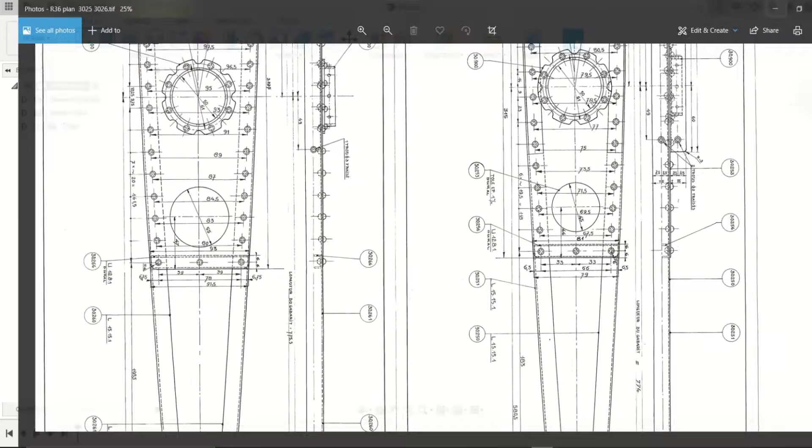Before we get started, the part that we will be creating today is a flange from the Renard R37, 38 and 40 series. So let's show the part that we will create. As you can see, this is a copy of the original design plans provided by Renard. The part number that we will design in this video is 30.900. This is the flange that we will be designing today.

Okay, so let's open the sketch panel in our Fusion 360. Either click Create Sketch or simply press L. In this case, let's select the X and Y plane.

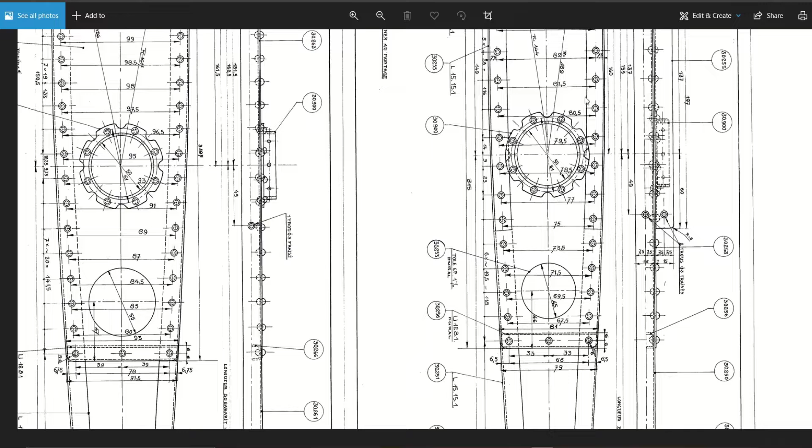Next, just sketch a rough shape that resembles half of the cross-section of the flange. So let's show the flange again - this is the flange and we will be creating a cross-section of this. So let's see if I can draw on this. So what we will be creating, if we have a flange, is this part for the revolve function.

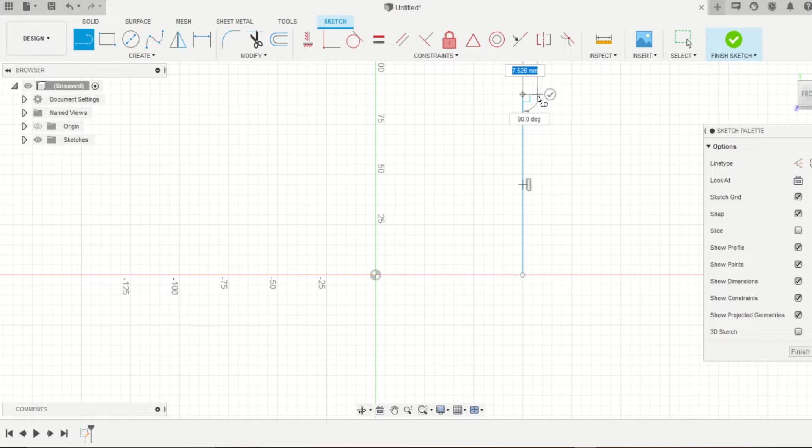Okay, so let's just create a rough sketch of it, just like this. And yeah, if done correctly, you should have this kind of L shape. But as you can see, it's still all in blue, so what we want to do is constrain the model first. In order to constrain it, let's make sure that the bottom side of the flange is aligned with the x-axis.

Let's toggle on our origin. You can just press I, and that will make your origin visible. And let's now make sure to align it - let's align this with the x-axis. As you can see now, the bottom of our flange is constrained.

Now that we've done that, let's add the dimensions. Note that because we want to use parameters, we'll first define a letter and then assign a numeric value to this letter, also better known as a parameter. For the inner and outer diameter - this being the inner diameter, this being the outer diameter - and we will define this as the thickness. For these, we will define a parameter beforehand, as they will be used to calculate the radius.

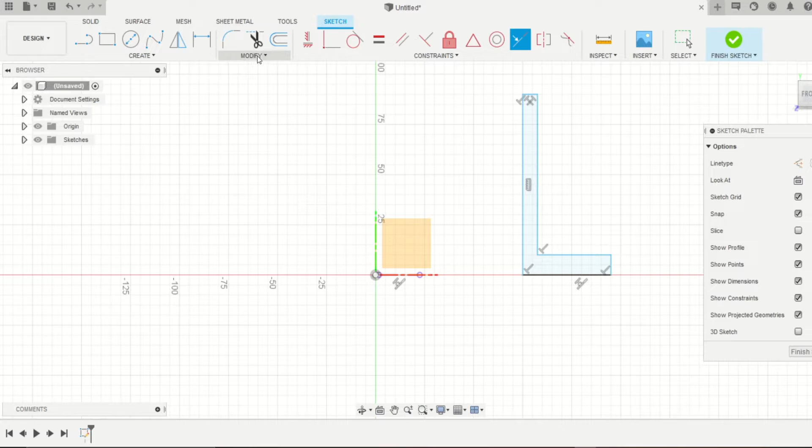So let's go to the Modify tab, change parameters, and now let's add a new user parameter. Let's enter a name - let's just choose DO, and let's say the outer diameter is 72 millimeters. Okay, next let's add another one with the inner diameter.

The inner diameter has a dimension of 50 millimeters. Next to that, let's add the thickness of the wall for the flange. So let's just give it the name T, and this has a thickness of 3 millimeters.

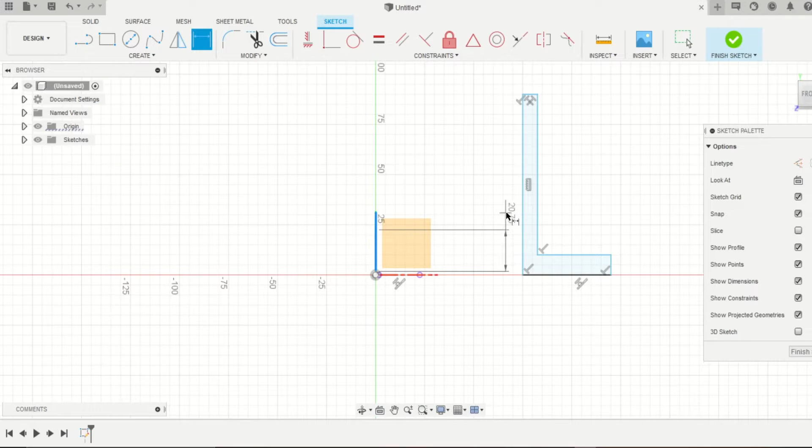So now select the sketch dimension and place your dimensions. In this case, we will say that it is equal to DI divided by 2. Let's call it RI. Okay, now we have the inner radius.

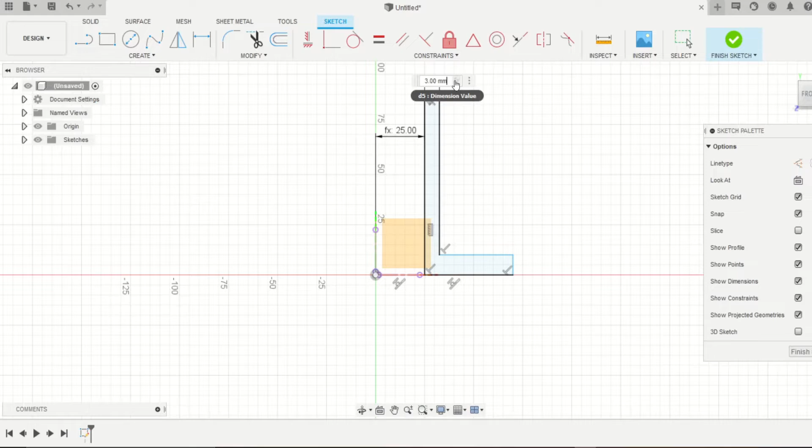And for this we will just type T, as this is the parameter that we'll be using. Then for the outer diameter we'll do the same - we'll be using a radius, so the outer radius equals the outer diameter divided by 2.

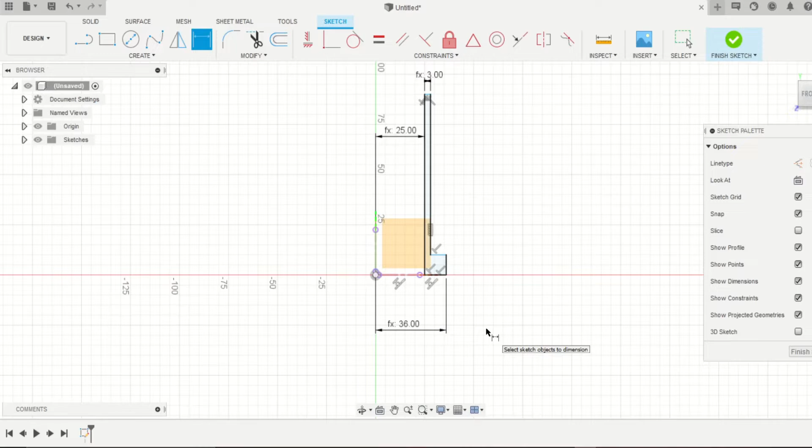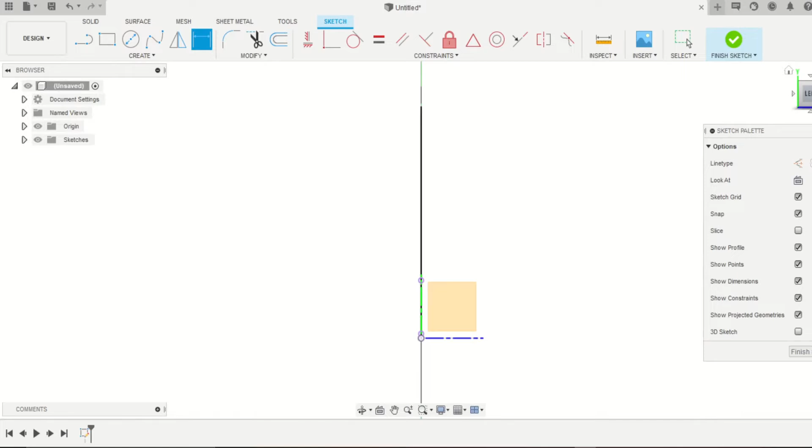Just like that. And as for the height, let's use two heights. Oh yeah, in case you accidentally change your view, you can just use your viewing cube to fix it again. Okay, so now we've got our view back.

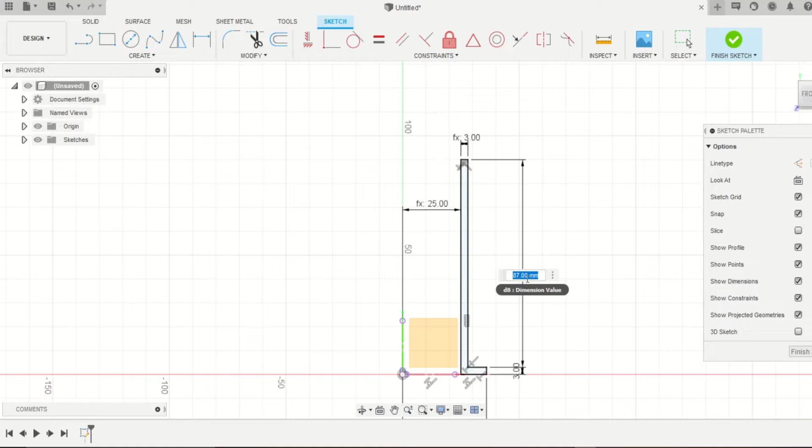So let's define our first height, h1 equals 3 millimeters. And our second height is 12 millimeters, h2 equals 12. Okay, so now we've got the basic cross-section of our flange.

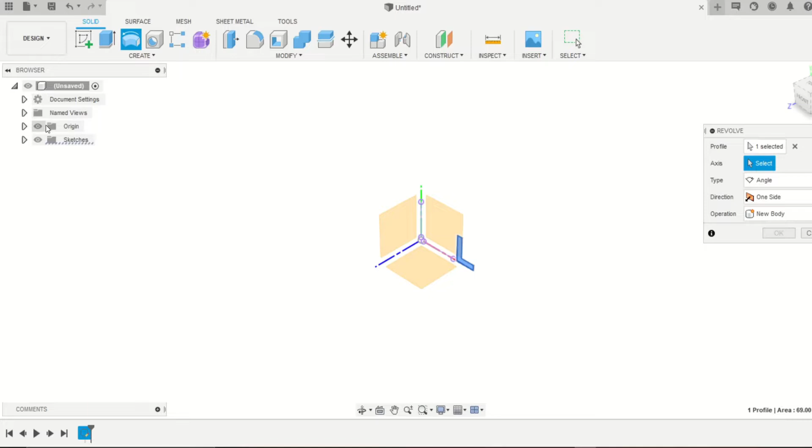What we can do now is just click the Finish Sketch button, then go to the Revolve function, select the area - in this case it automatically selects the area that we want to use for the revolution function. And now just select your axis. In most cases you can just select the y-axis, but make sure that your origin is visible. So let's select this, and now it will create a full 360-degree round revolution. And press OK.

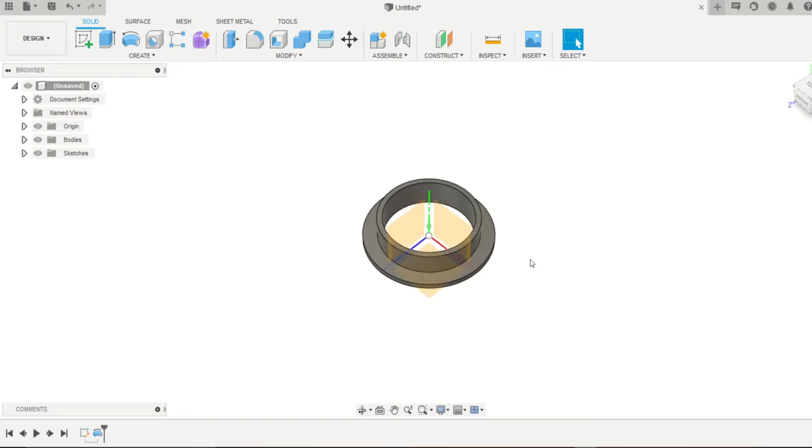Now that we have created the revolve, let's select the bottom part of the flange and start creating. So let's just quit this. Yes, so what we will do now is create the holes and these radiuses. So this is the next thing that we will create. Okay, so let's select the bottom part of the flange and create a new sketch, just like that.

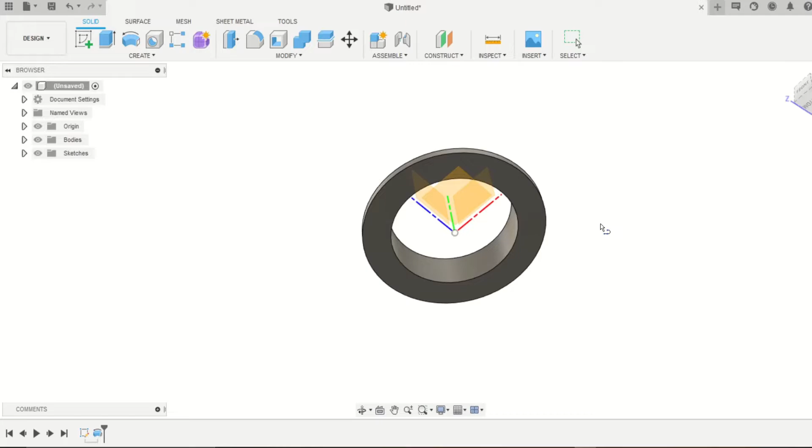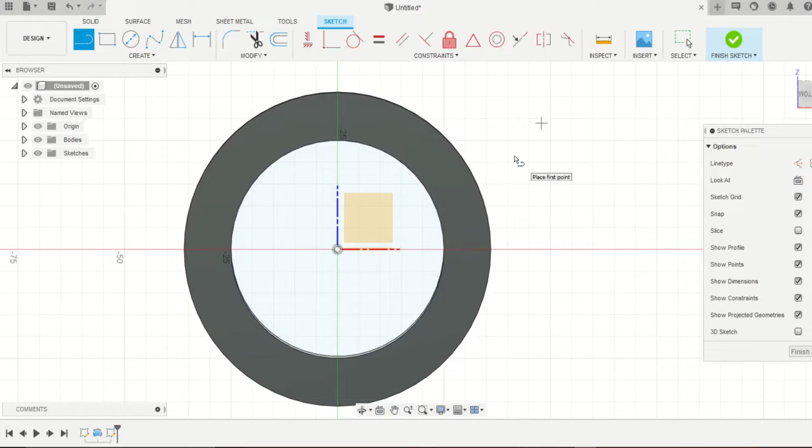Then go to project or include. Just click the project button and choose this side. This way we can visualize the perimeter of the thickness of the flange, just like that.

Okay, let's go back to the bottom view. Let's lock our view so that we can go in 3D mode again. Okay, and now let's add the holes. So in total there are 8 holes with a diameter of 4.5 millimeters.

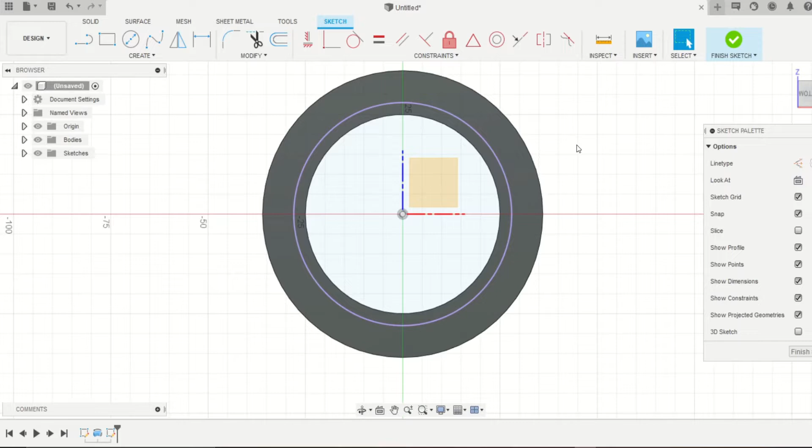So how we will do it, we can just create one hole. In this case, let's just like that. Unconstrained, let's add a parameter like dh from diameter of the hole equals 4.5 millimeters.

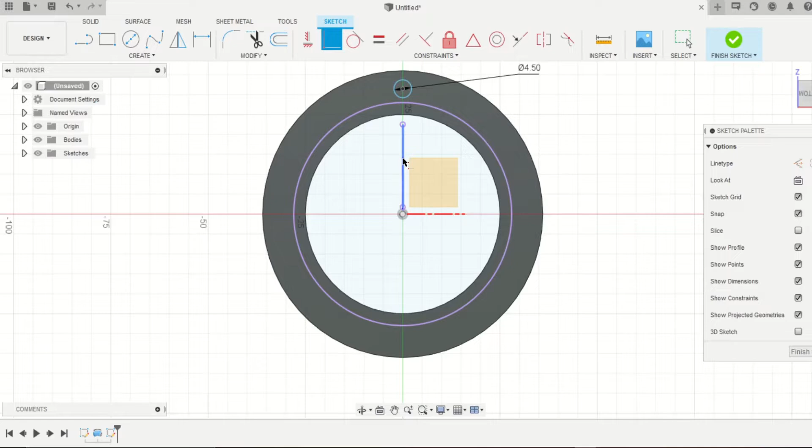Next thing that we will do is make sure that it coincides with the z-axis, just like this. And now we'll define the distance from the center. So let's say we always want it to be in the middle of the outer diameter and the defined thickness of the wall. So if we have a thickness of 4, it will automatically correct the hole so that it's always in the middle of the actual flange that we have. So if you would look at the part upside down, like the overhang that you have, you always want the hole to be in the middle of that.

Okay, so in order to do that, let's just take the outer diameter, namely 72 divided by 2, so 36 millimeters, minus our inner diameter divided by 2, or our inner radius, and this minus 3. Or to put it, just put it otherwise.

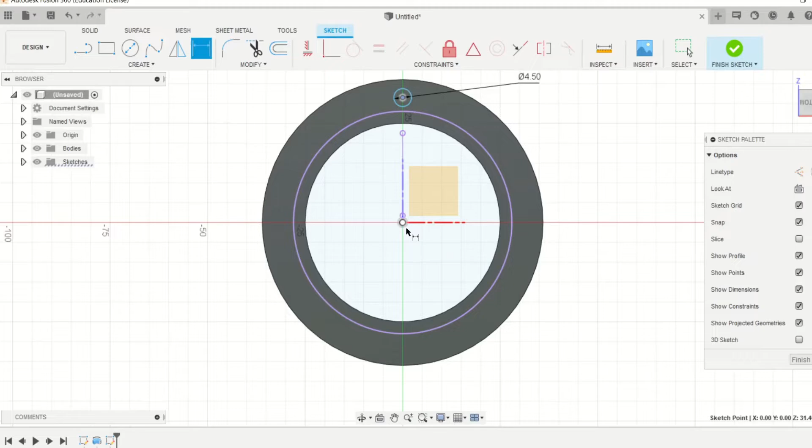Okay, so now we can define the distance from the center. So we can just simply define that by, so let's select it. Let's call this one A. A equals, let's use brackets, our outer radius minus our inner radius minus our thickness, and this divided by 2.

Let's see. There seems to be an error. I'm not sure what it is. Maybe it's just a small thing.

Okay, so in some cases, like some letters you cannot use. Yeah, it could be related to like area or surface area. So in most cases, make sure that you, if you have a red formula, check if the letter you're using isn't already used for Autodesk Fusion 360 itself. Such as, just to give a simple example, if you will use the big letter T, it will not use it because it is used for temperature calculations when you do simulations.

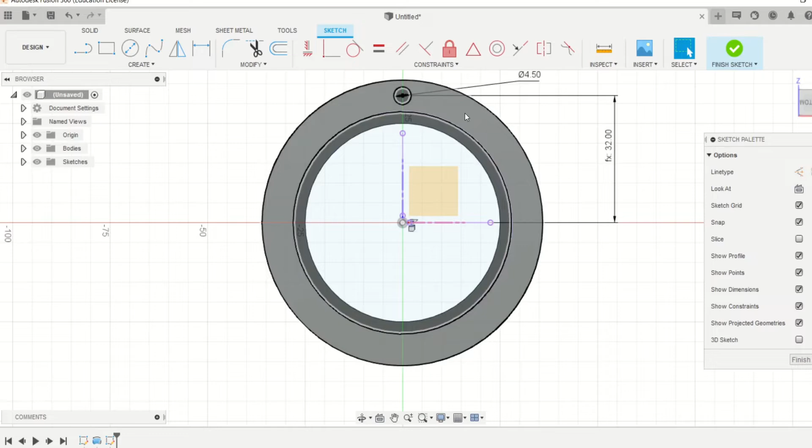So the next thing that we will create is the other holes that we have, these radiuses, and these have a radius of 5.5 millimeters if I'm correct. Yeah, 5.5 millimeters. So in order to do that, let's first give them the correct angle. They have an angle of 45 degrees.

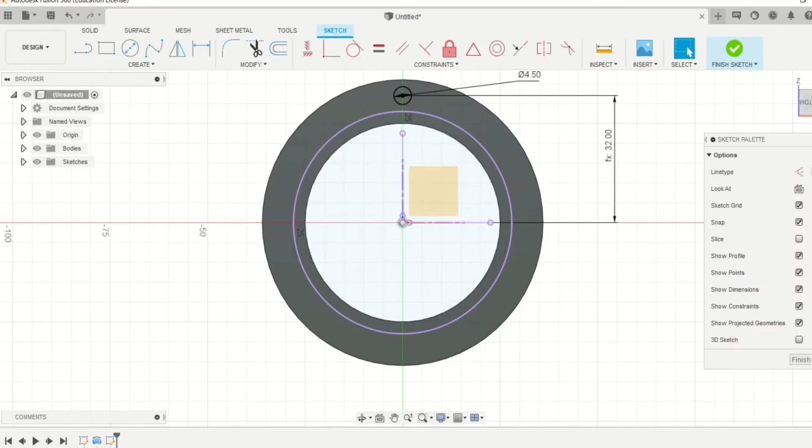So for that, let's create a line. Let's give it the same distance. So let's create a line just like this. And make sure that it goes all the way to the perimeter of our outer diameter. And let's give it an angle of 45 degrees.

So let's say alpha equals 45. Oh, my bad, 45 divided by 2. Alpha equals 45 divided by 2. Okay, just like that.

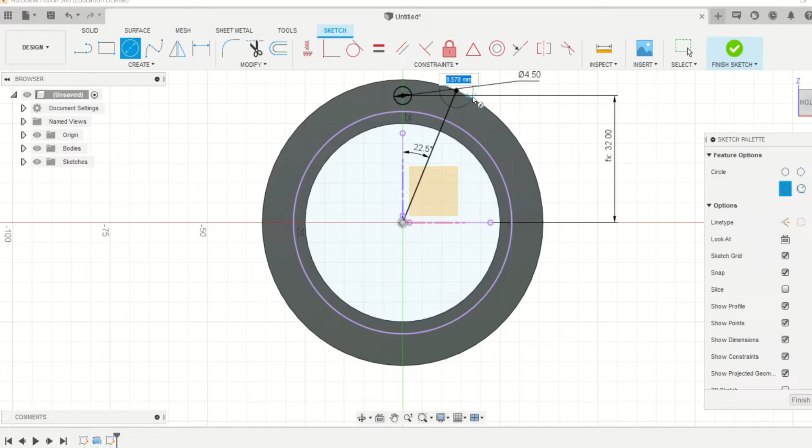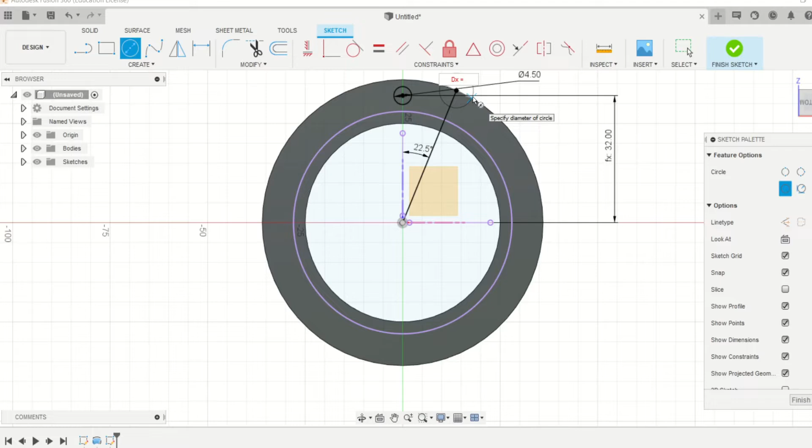Let's now create this section. And it has a diameter of, let's say, D. Let's call it dx in this case, equals 11. Just like that. Okay, now we've done that, we can just finish the sketch. Press extrude.

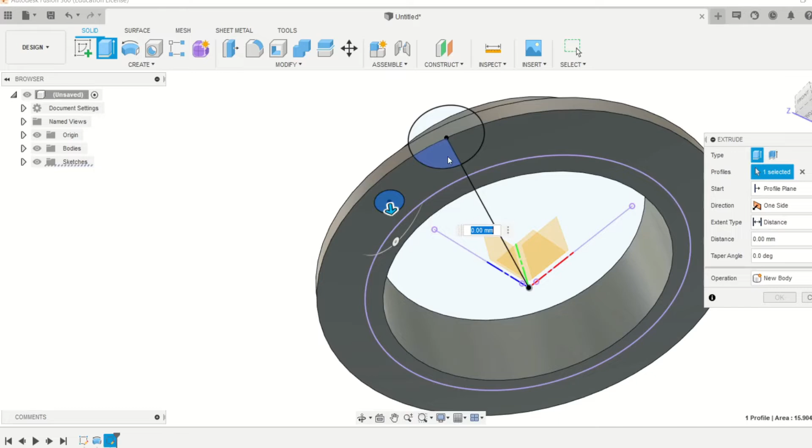So let's go to the extrusion. Select the profiles that we want to extrude. And we can just cut it all the way through, just like that. Okay, press OK.

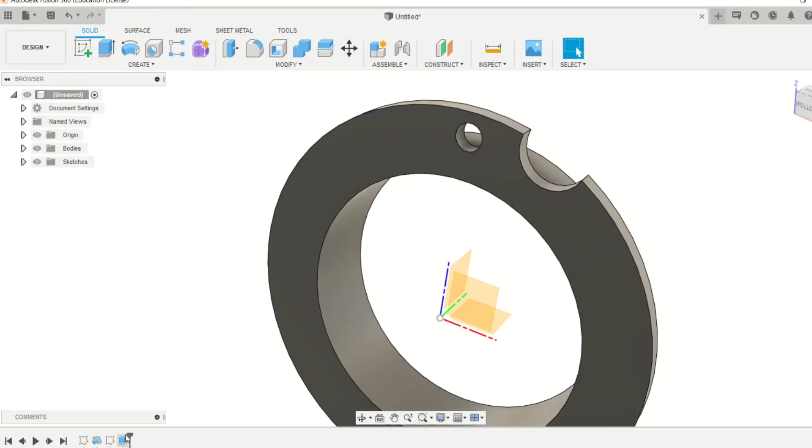Now that we have that, we can select them using the Control key, or just selecting our extrusion in our timeline. So let's select the extrusion, create, go to pattern, circular pattern. So yes, there are objects and features that we want to select. You could also do it for bodies, but in this case we're talking about a feature, such as an extrusion. Next, let's select the axis around which we want the pattern to be fulfilled.

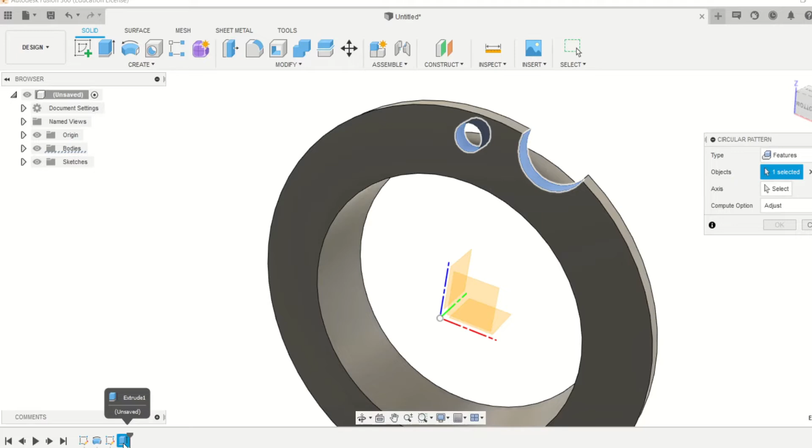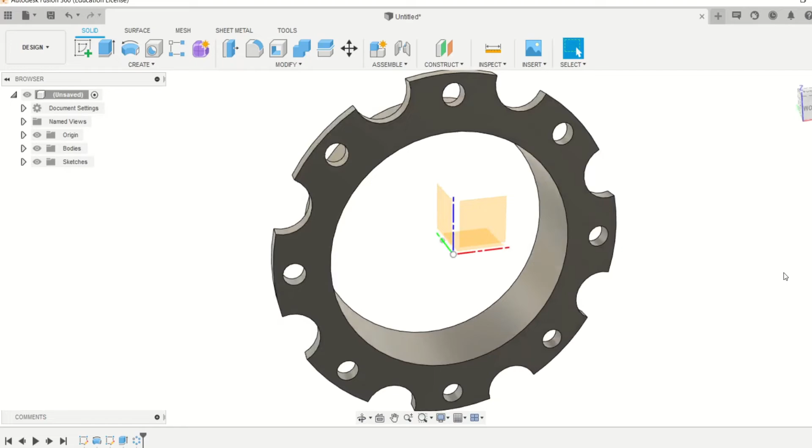Okay, so we've chosen the center axis, and now 8. And if we now press enter, we have the basic shape of the flange. Of course, we still need a radius of 3. In order to do that, let's go to the fillet and select all these edges.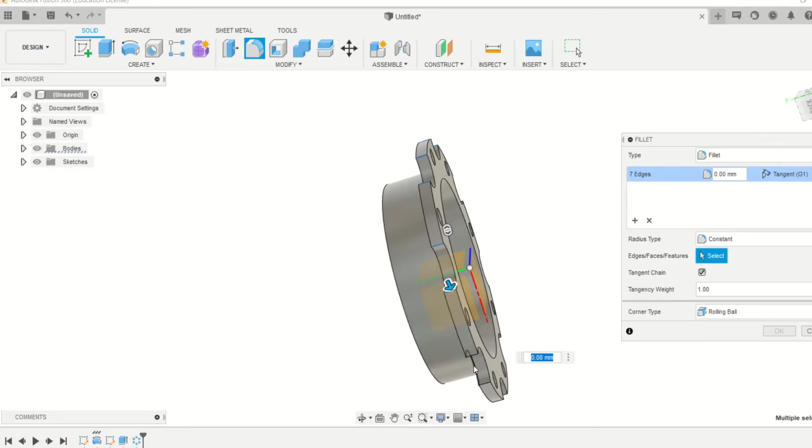Okay, and once we've selected all the edges, we can fill in the value. In this case, 3 millimeters. Hit OK, and here we have it.

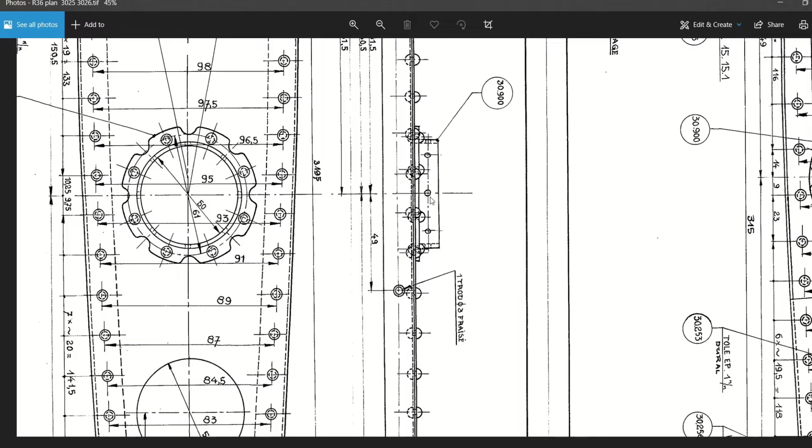Now, as you can see, we still need to add these holes. These holes have a diameter of 3 millimeters, if I'm correct. So for that, let's just choose a plane, just like that, create our circle, and say dy in this case equals 3 millimeters. Okay, here we go.

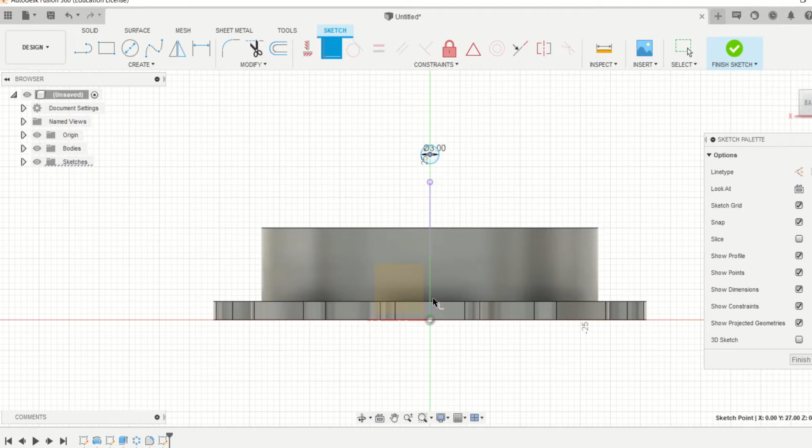Now let's make sure that it's aligned with the center axis, and the total height of this should be h2 divided by 2. So let's select this as our reference point. No, chosen the wrong thing. Dimension, just like that. Let's take h4 equals h2 divided by 2. Just like that. Finish sketch. Extrude it.

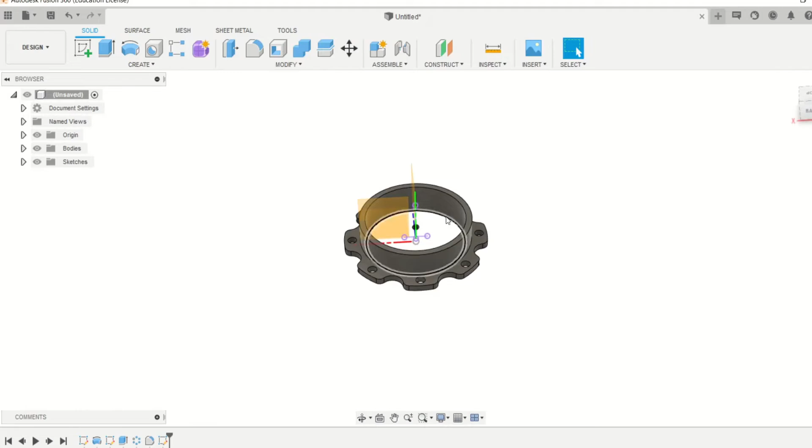And now again create circular pattern. In this case we won't choose faces, but again we will choose the features. Select the last feature that we've used, namely the extrusion or the cut that we made. Select the axis, and again 8 holes.

Yeah, I've just realized we've made a small mistake, or I've made a small mistake. This has to be inclined under a certain angle, so the hole has to be between the main holes for mounting the flange, which actually isn't such a bad thing, because now I can show you something else, namely how to create a custom plane at an angle.

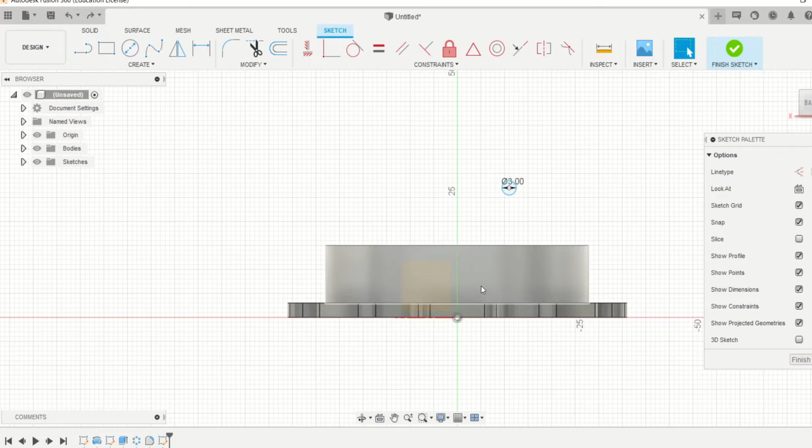Okay, so let's return. Let's create a plane at an angle. Select this axis and 45 degrees divided by 2, just like that. Okay.

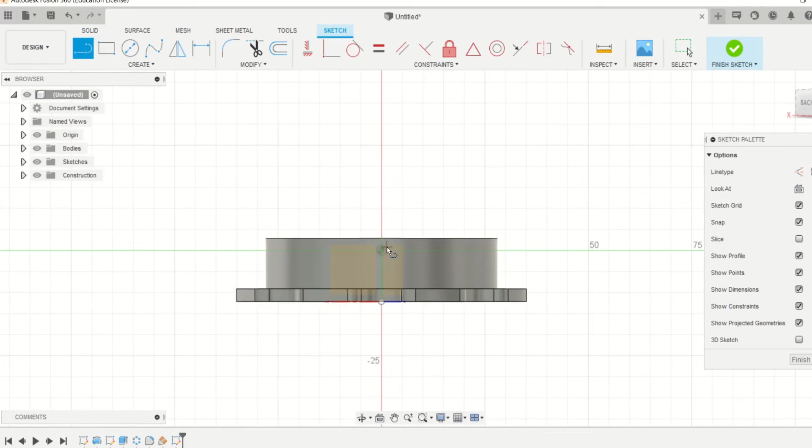And now we will just do the same. So dy equals 3 millimeters. Align it with the y-axis, and again define the distance above the upper side of the flange. In this case, h4 equals h2 divided by 2, just like that.

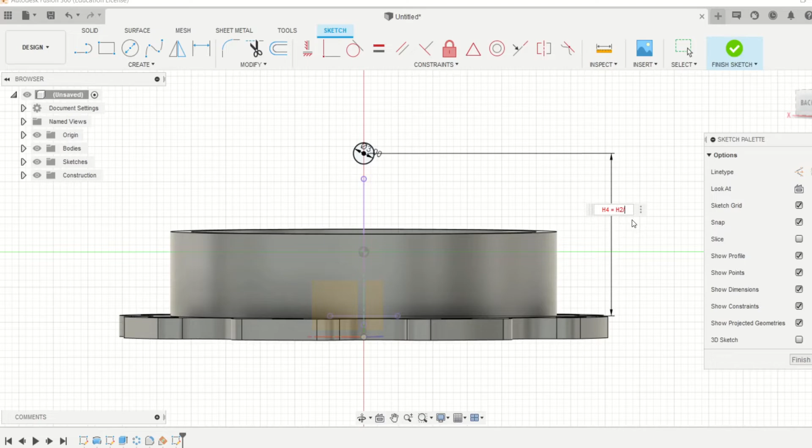Now we will extrude it, just like that, and create a circular pattern. Okay, let's not go for the faces, but for the features. Select our feature, and then our axis, and indeed we have 8 holes that need to be made.

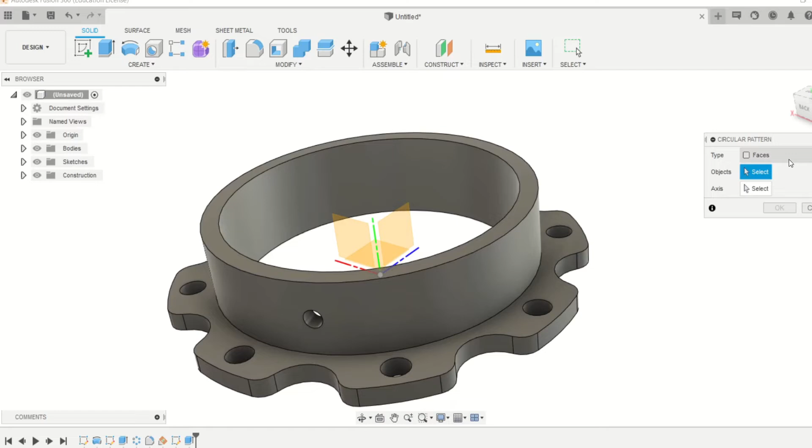So now we have our flange. Now we have created the flange of the Renault R37, 38 and 40 series.

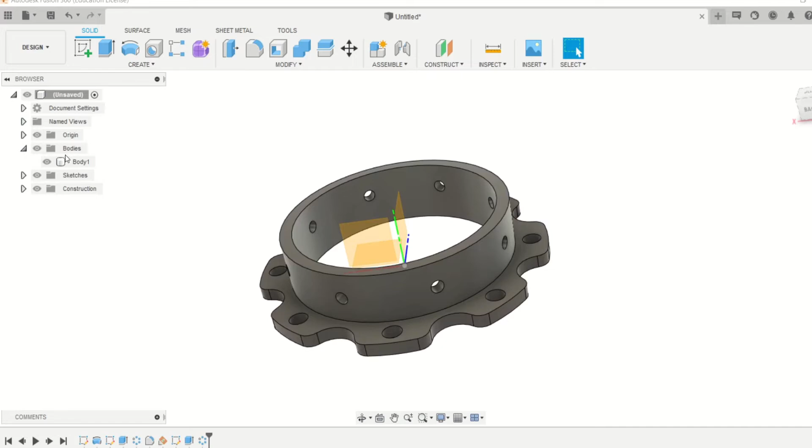But of course now we don't have a material defined for it. So in order to do that, you can go to bodies, select your first body, and then physical material. Now your Fusion 360 will bring up the physical material panel, and here you can choose what material you want it to be. In this case, let's just pick aluminum 6061 hot formed, just like that. And now the physical material has been assigned to it.

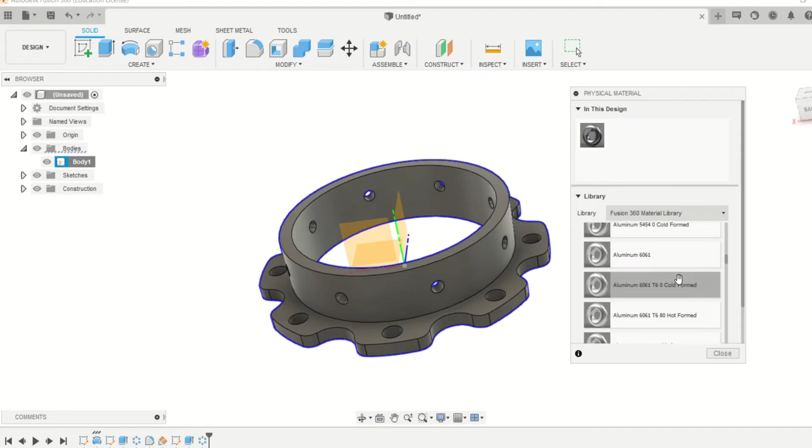Just to check it, you can go to properties, and it will tell you the density it has. You can also find moment, mass, etc. As you can see, the physical material is set to aluminum 6061 T6 hot form.

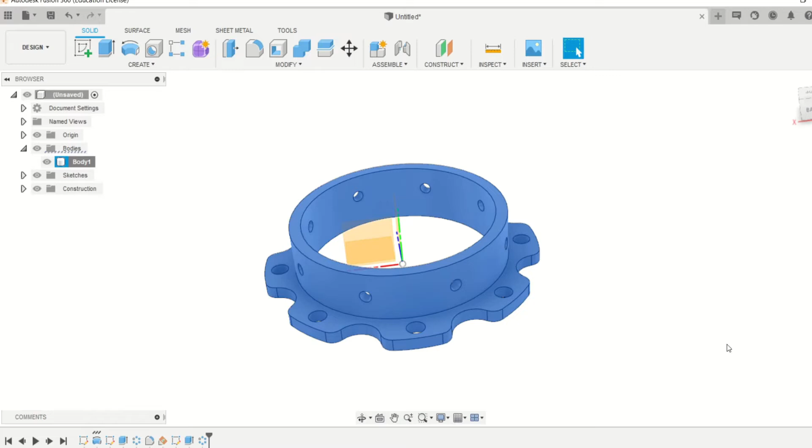Okay, but now we have created a parametric model, but why is it useful? Well, it is pretty useful because you can just go to your Modify tab, then change parameters, and here you can change all the dimensions. So let's say I want the thickness to be, where is it? User parameters. The thickness to be 2 millimeters.

And now it has changed the thickness of it to 2 millimeters, just to make sure that it's correct. As you can see, now the distance between the inner surface and the outer surface is 2 millimeters. So this is pretty useful, especially if you have iterative design, or you want to look at what effect certain dimensions have on your design.

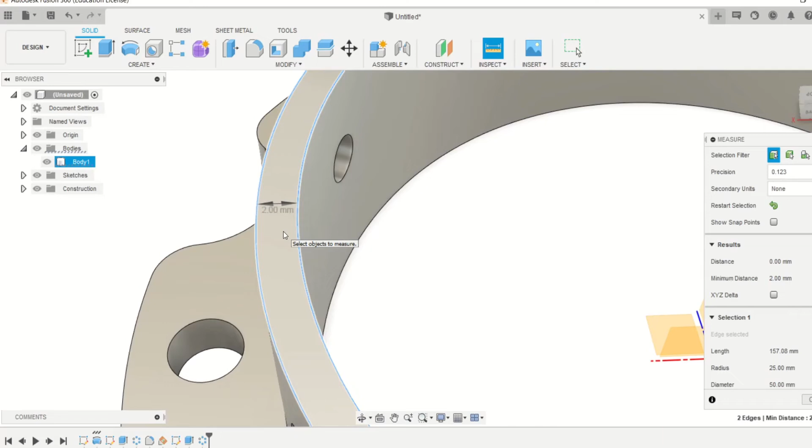Parametric modeling is really useful. It's a really powerful tool. And especially for complex parts, I advise you to use it. Like for simple parts that are just straightforward, you know those are the dimensions you will be needing, you can do that. But if you have more of an iterative design, it's not a bad idea to use parametric modeling.

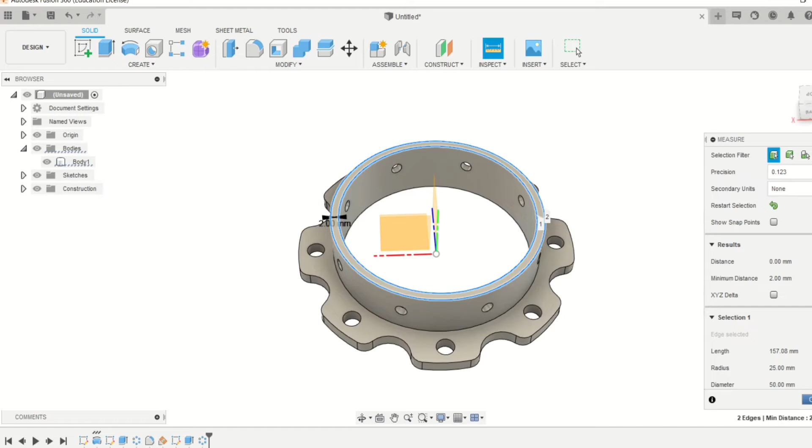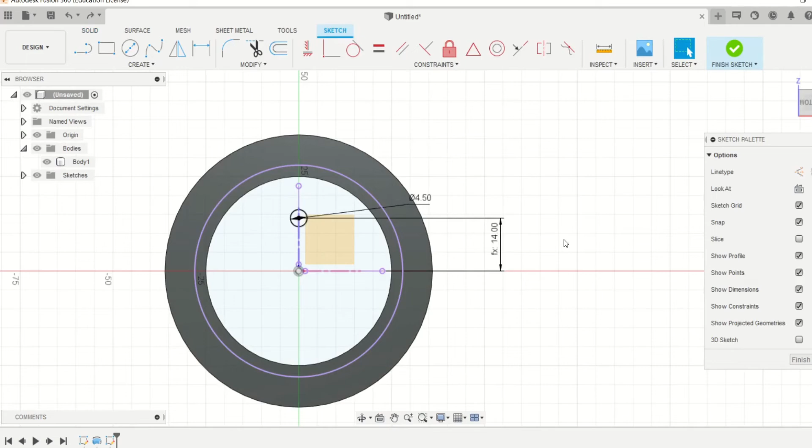Okay, so now let's try to do the same, but starting with an extrusion. Just like that. Let's go all the way back, create our sketch, but now let's select the X and Z plane. Again, you will be using the diameters that we used before. Yeah, practically it's just the same that you will do. You'll use the same parameters, but now you will use extrusions. And actually, maybe it's not such a bad idea to give it as an exercise to try it yourself. It wouldn't be a bad idea to try make it yourself and create the model.

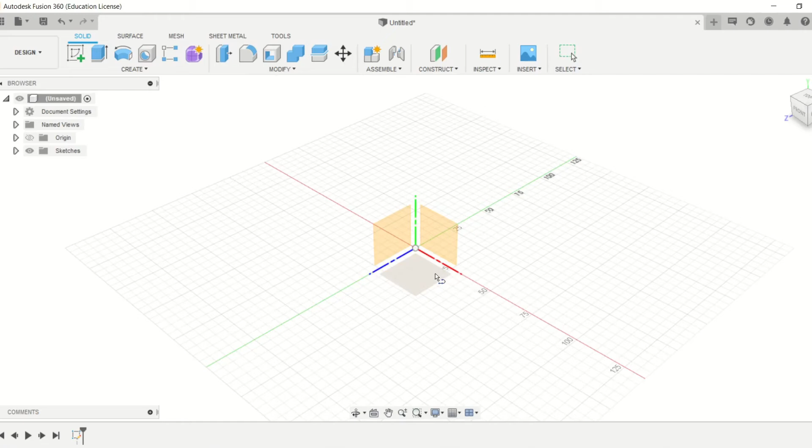After having created the flange with part number 30.900 using the Revolve function, let's do the same making use of extrusions. First of all, let's create a sketch. In this case, we'll be using the XZ plane. So once you've chosen your XZ plane, create a circle with an outer diameter D0 of 72 millimeters.

Next, let's constrain it. So let's constrain it to the origin. And now let's draw the inner circle with diameter DI equals 50 millimeters. Next step is to...

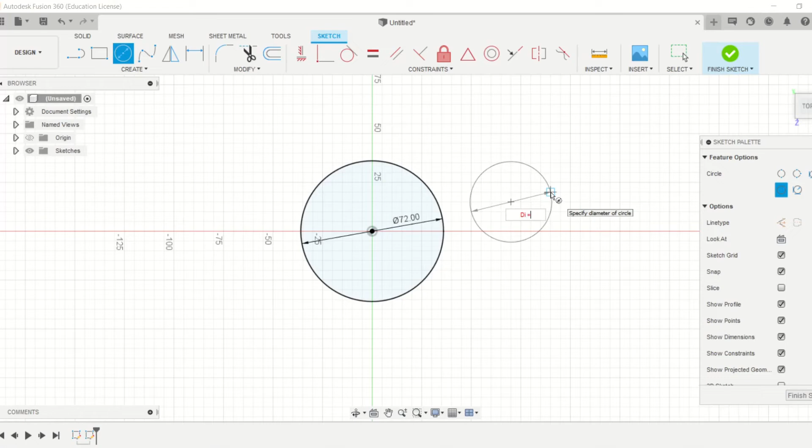Define the thickness. So for doing that, let's go to parameters. This is something that you can find in the Modify tab. Change parameters, user parameters, create a new one. Let's call it small t and give it a value of 3 millimeters. Okay.

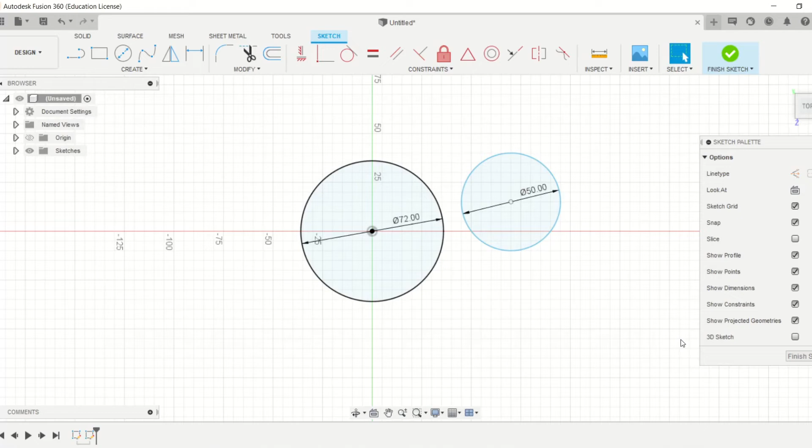In order to define the outer diameter of the wall, we can use a simple formula. First of all, let's make these two concentric, just like that. And now, let's just say that this equals Di, our inner diameter, plus 2 times our thickness.

Equals our inner diameter plus 2 times t, just like that.

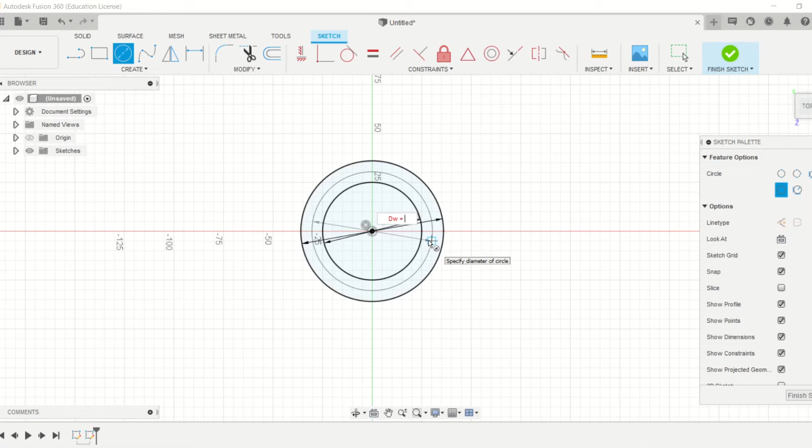Now let's draw the indentations and the holes in the flange's base plate. For that, let's create a circle with diameter dx equals 11, and constrain it just like we did last time with the revolve situation.

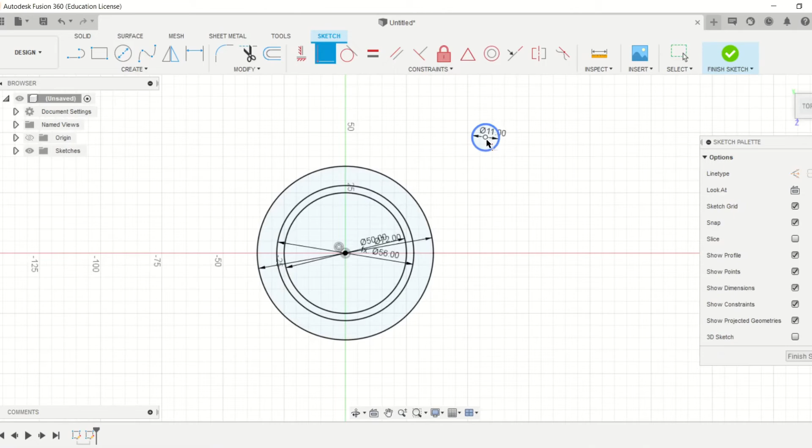So let's visualize the origin. Okay, and make sure, just like that. Next, let's create the hole. Give the hole diameter dy of 4.5 millimeters, as we did last time.

And say A equals, using a small formula for finding the center from the outer diameter of the flange's base to the outer diameter of the wall thickness. We can simply find that by saying this is our outer diameter divided by 2, minus our outer diameter divided by 2 minus our inner diameter divided by 2, minus our thickness, and this divided by 2. We can call this A.

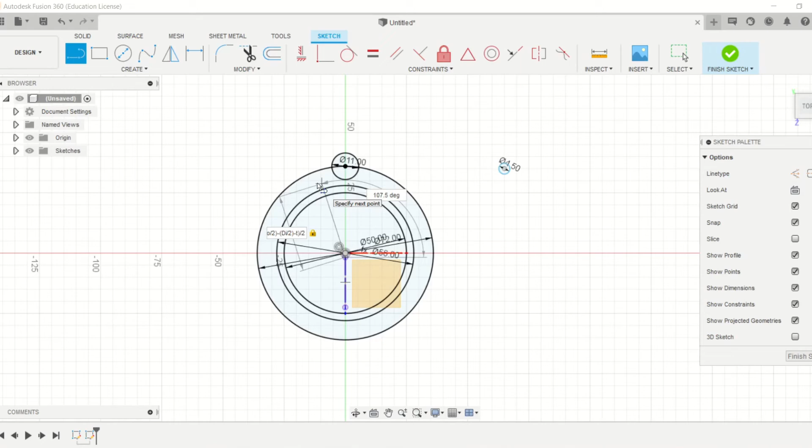Okay, next let's give it the same angle as before, 22.5 degrees, or just 180 minus 45 divided by 2.

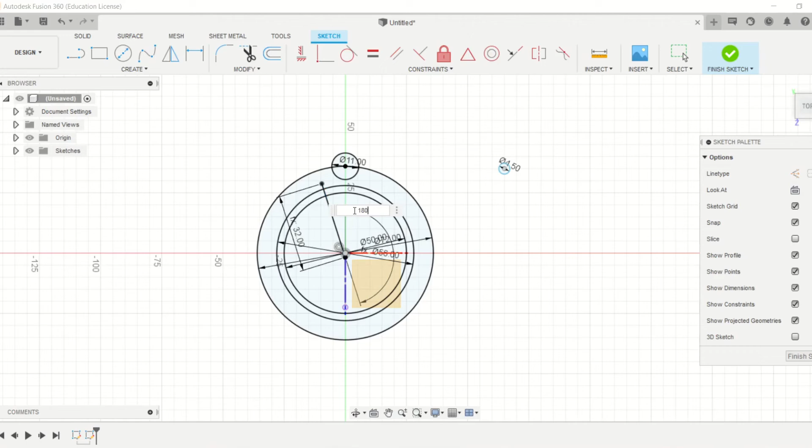Now constrain this to that. So I see we should change this up, minus dw. Okay, just like that, a small mistake got into it. And we've got our alpha.

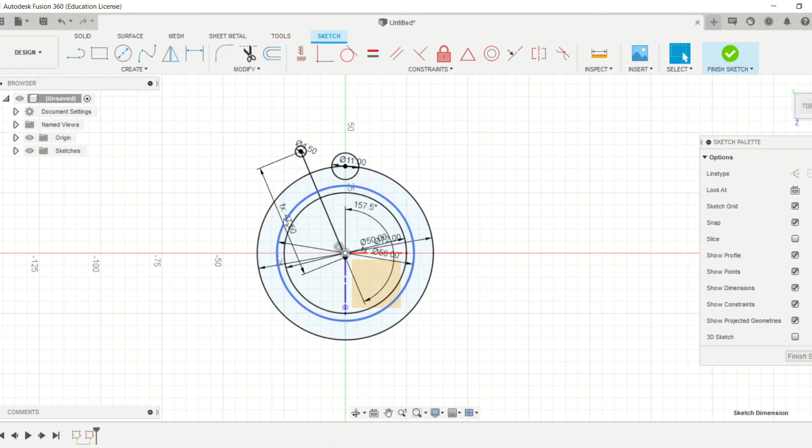The next step is to create our circular pattern. Check everything we need, select the center axis. In this case we didn't select everything, like sometimes you select the center point of the circle, but in most cases you want the perimeter of it. Center point, and we want 8 instances.

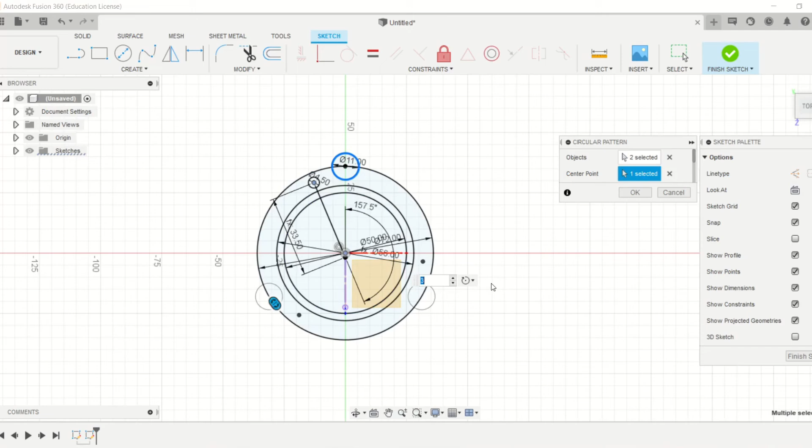Just like that, okay, let's finish our sketch and start extruding. Let's press the E key or go to extrude, and here let's say this is h1 equals 3.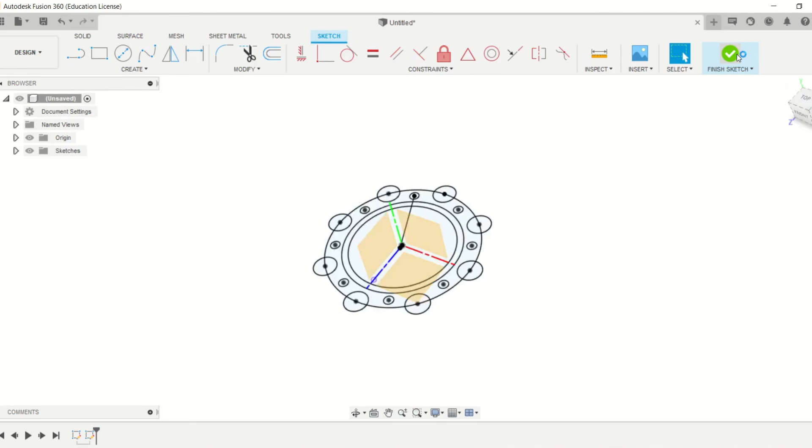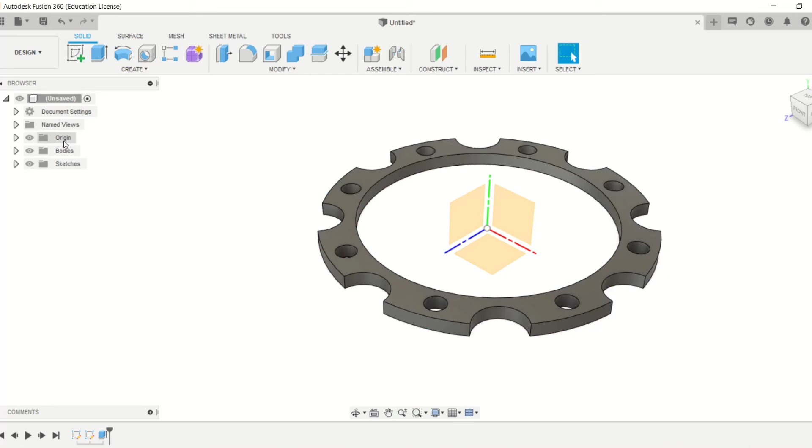Now our sketch disappeared, but we can fix that by going to our sketches and clicking the visibility button to make it visible again. Now let's extrude our wall here. Let's call this h2 equals, in this case let's go for 15.

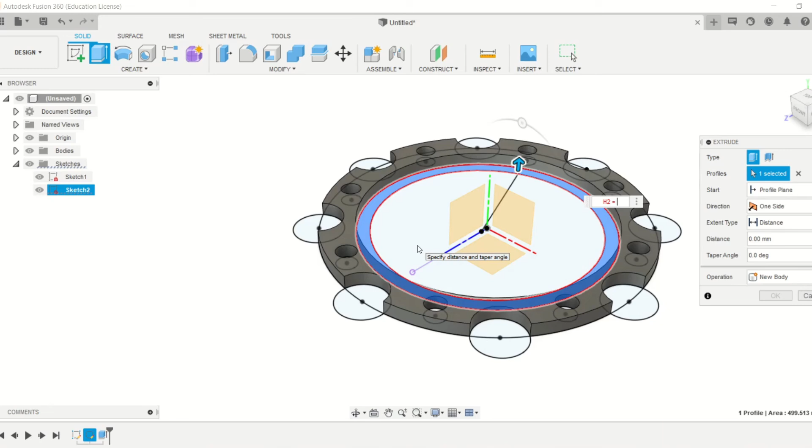Let's hide our sketches again, just like that. And now create another sketch for the holes we need to make in the wall. Here let's choose dz equals 3 millimeters, and let's align it with our y-axis.

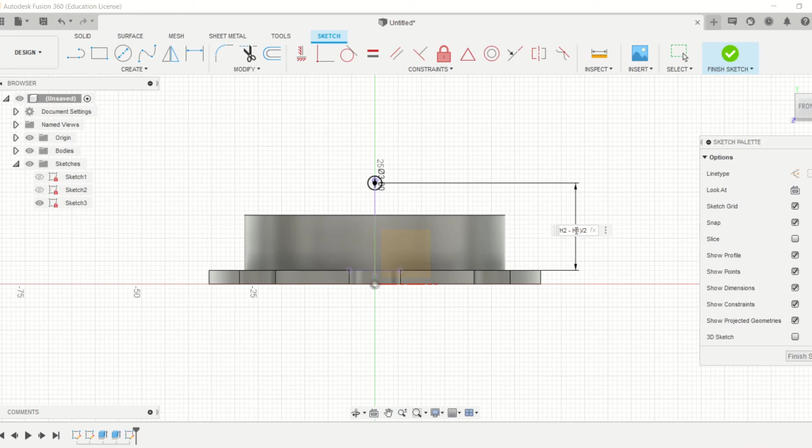And the distance it needs to have, as seen from the top of the flange's base, equals h2 minus h1, still need to place brackets, divided by 2. Okay, and now it's in the middle of the extruded section. So if you change your base plate's height, it will also change the distance the hole has as seen from the top of the flange.

Finish sketch. Extrude it. Okay.

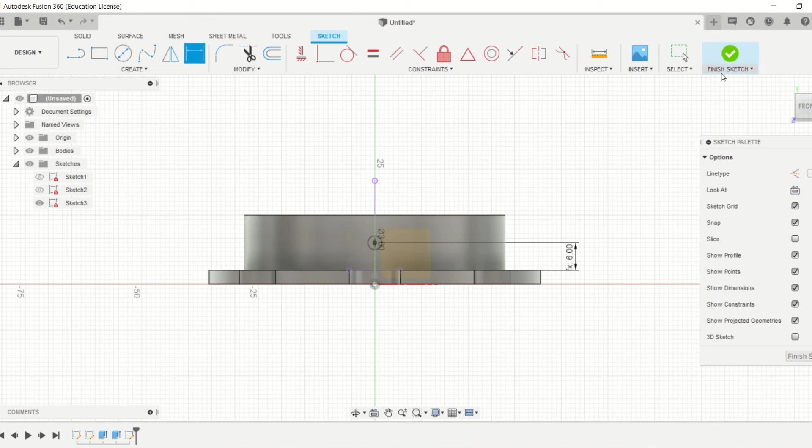Now let's create our circular pattern. Go to patterns, circular pattern, select the features button, like the hole that we made. Now the axis, you can choose inner face, outer face, or just one of the perimeters. In this case we'll go for the inner face and select 8.

Press OK. Now let's create the fillets. You can go to fillet or press the F button, and let's create all the fillets we need, selecting all the sides we want to add a fillet to, just like that.

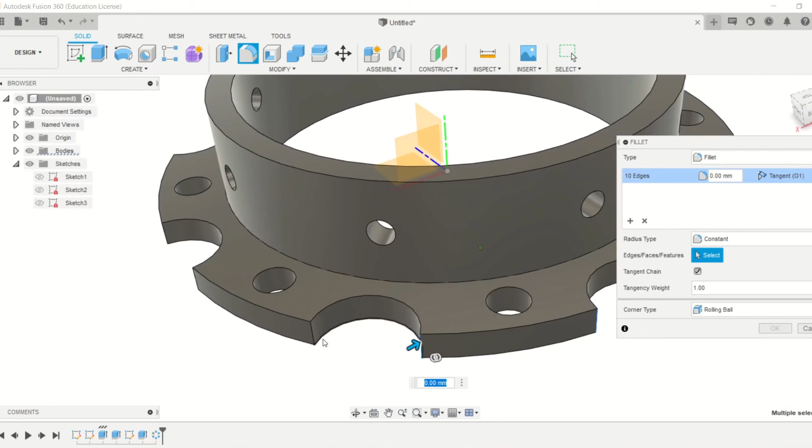Okay, and give it a size of 3 millimeters. Hit OK, and now let's go to bodies, right click it, physical material, metal, and go to aluminum 5083 cold formed. Close. So now we've created the same flange as before, but using a different technique, and it's still parametric.

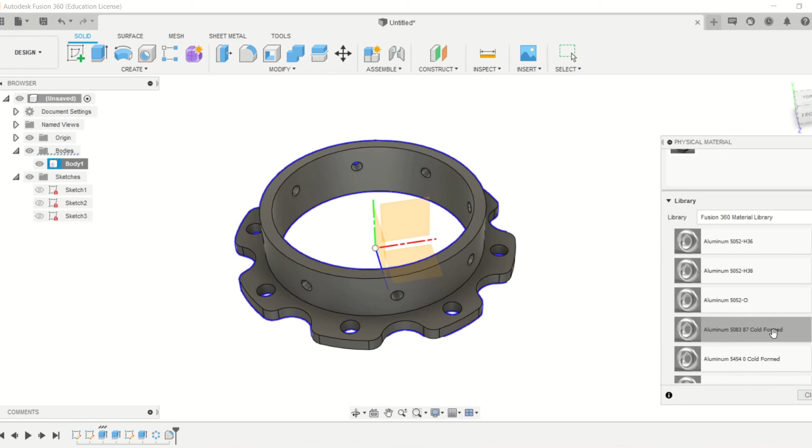So in order to show you, let's go to change parameters and make it a little smaller so you can see what happens. Let's change the parameter to 1.5 millimeters. You can see the holes changed position, the wall thickness decreased, and everything else adjusted itself.

So let's reset it, modify, change parameters. In this case, let's change our height to, let's go a bit extreme, 30 millimeters. Okay, as you can see, the holes are again in the middle of the wall section. Let's reset it to the value of before, 15.

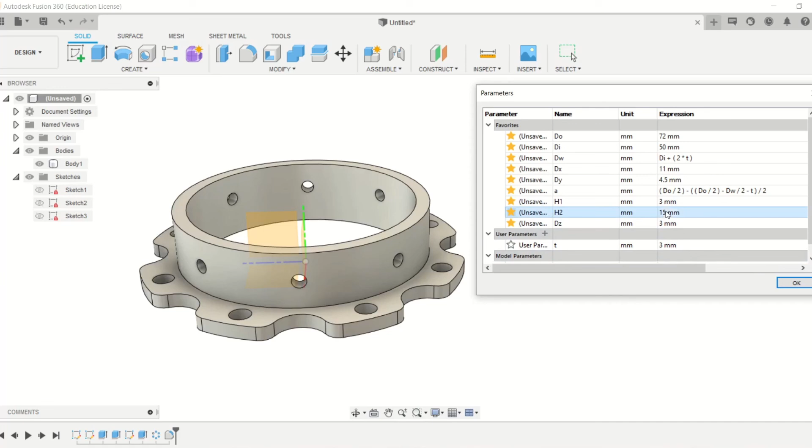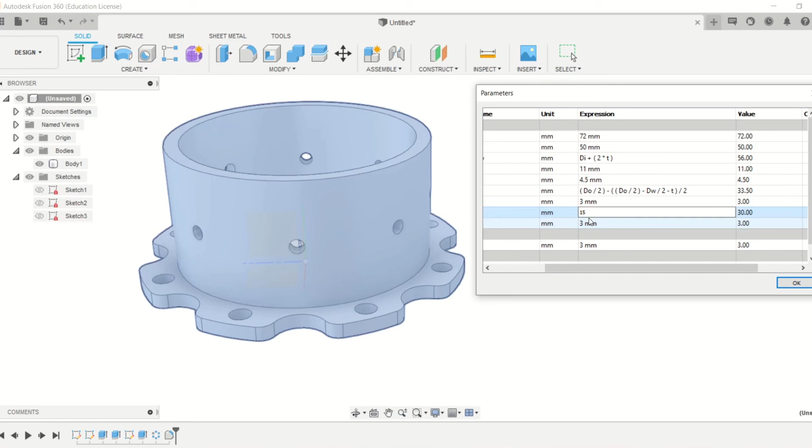So that was it for today's lesson. In the next lesson we will be looking at how you can create wing ribs using the sheet metal function.